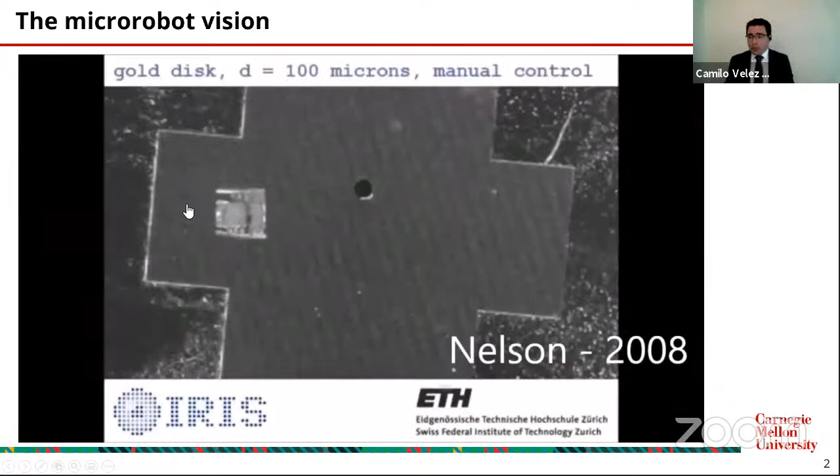The vision has been updated, especially by movies like Big Hero 6, trying to have a swarm of robots that can cooperatively work and do something. Right now the state of the art is little robots that move, mostly magnetically, and the work they can perform is still simple.

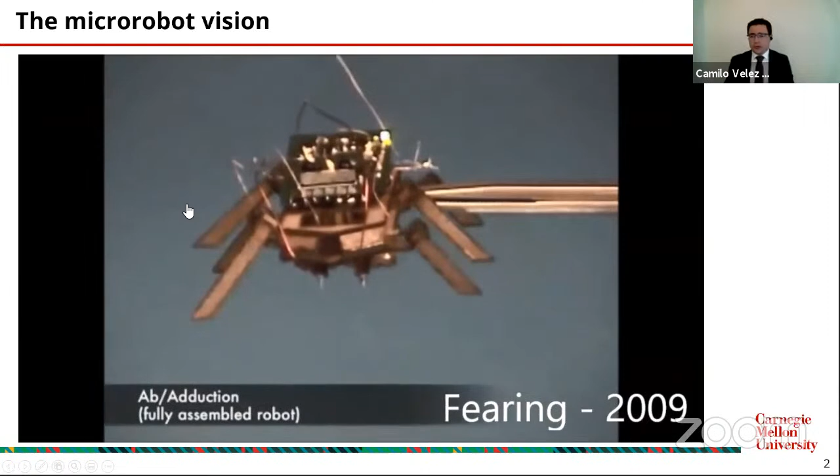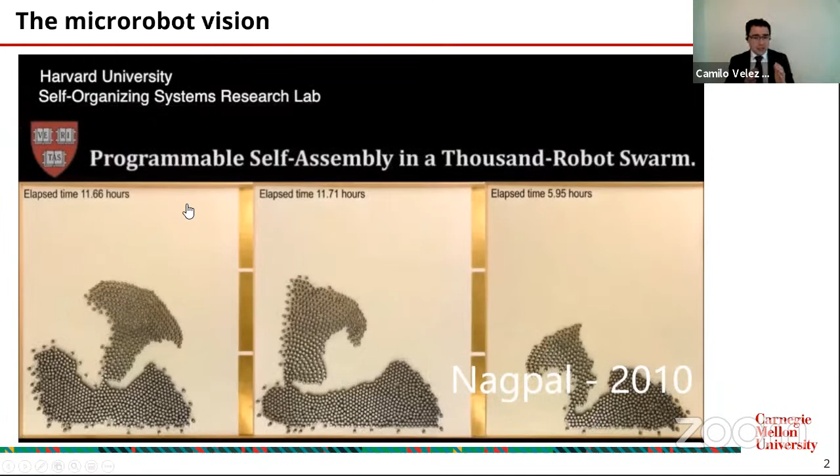We have flying robots from Professor Wood in 2008, and walking robots from Professor Fearing in 2009 — these are just examples of cooperative work. We consider microrobots everything at small scale, like below centimeters, and most of those robots have been tethered, attached to magnetic fields or wires, as you can see in this video.

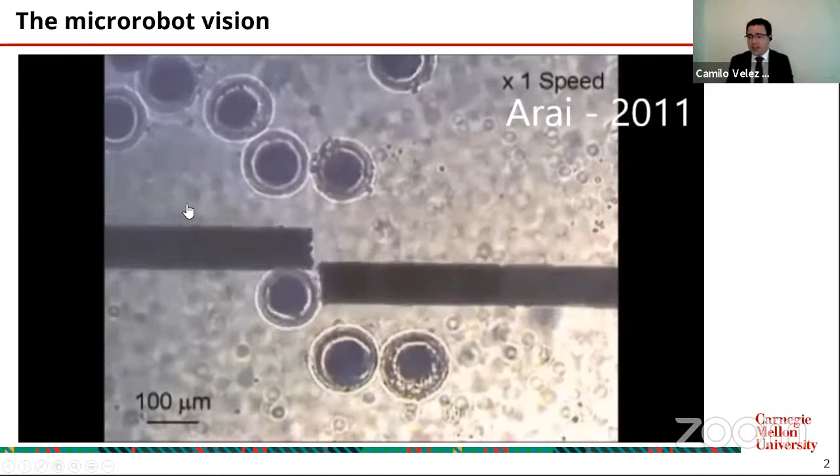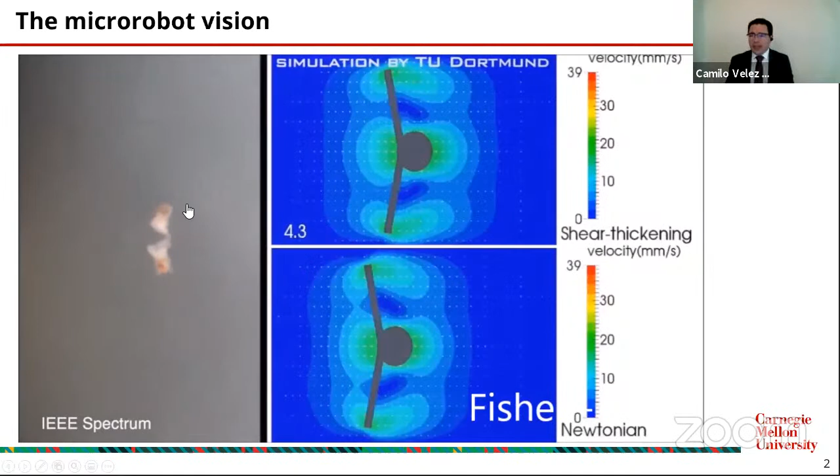They will need to improve a little bit in order to do complex tasks in the future. Right now we have some that can walk, that can swim, that can fly. This is a very exciting time for microrobotics because there is plenty of opportunity.

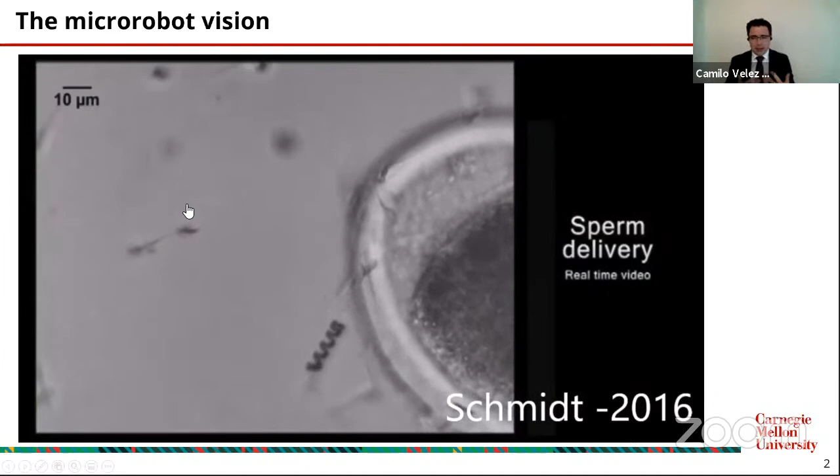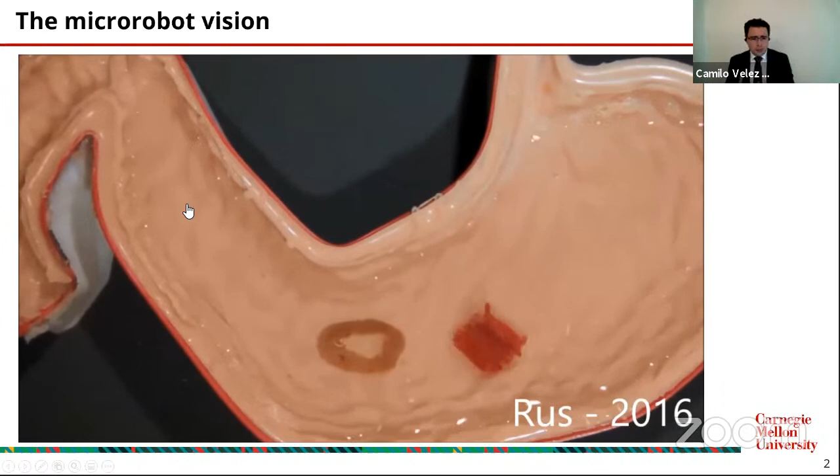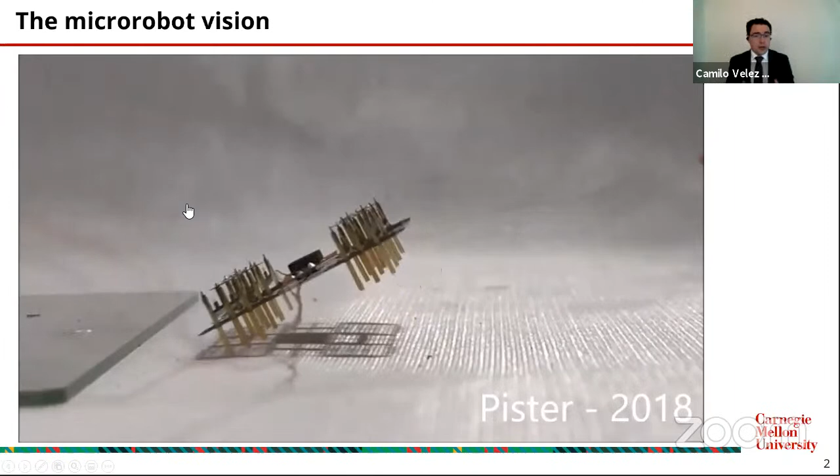One of the most important opportunities is in biology, and the interaction between these microrobots and cells. Here we have some connecting with sperm cells for fertilization. This one is to put in the stomach, from MIT, just to pick up batteries and patch some infections in the stomach. And we have some interactions with bacteria, as the one we saw here.

So a little bit of the panorama of microrobotics: it's in the robotics industry, of course, which is a growing industry that last year reported around $38 billion in revenue, and it's growing very fast. You're going to find microrobots in two realms — one is in medical implants or medical and surgical robots, and the other is industrial applications.

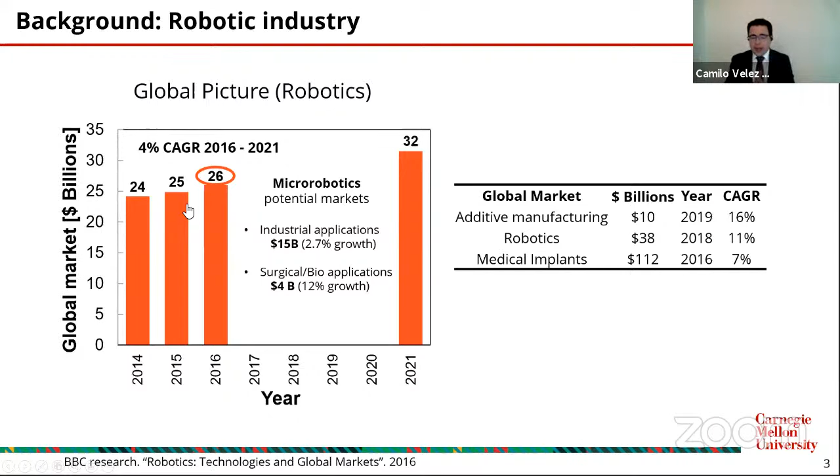Just because the type of robots that I'm going to present to you require additive manufacturing, I add this market of additive manufacturing, which is growing very fast and is an enormous opportunity.

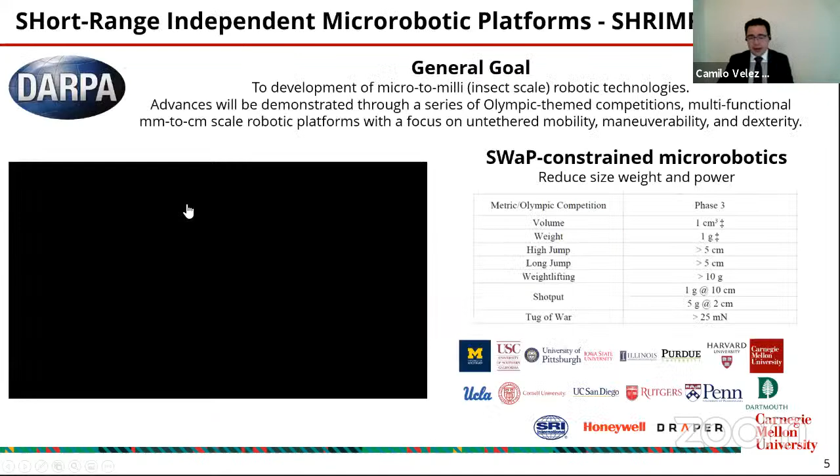So what I'm going to present today is a big challenge created by the Department of Defense, by DARPA, where they're trying to make little microrobots more functional and do different jobs. They created this program called SHRIMP, creating robots at millimeter scale, like 1 centimeter by 1 centimeter by 1 centimeter, that can integrate electronics, actuators, and the battery itself.

So that was the big idea, that they participate in a competition where they can jump higher, throw something in a shot put competition, long distance, weightlifting, or tug of war. It was 14 universities and 3 companies working on this one.

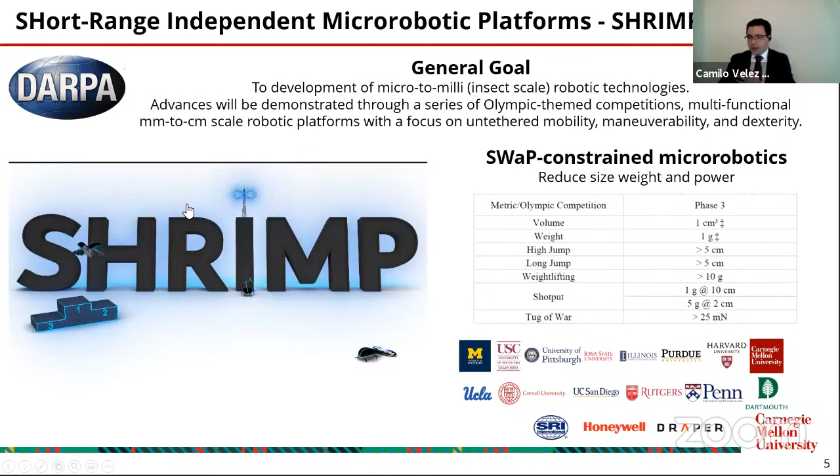The approach that we took at Carnegie Mellon in Professor Sarah Bergbreiter's lab was to use the technique that is right now the most commonly available for microrobotics, which is 3D printing and additive manufacturing. But if you want to do a microrobot with additive manufacturing, not all 3D printers work.

The state of the art of the most used one is going to be the 2-photon polymerization technique, and this is the one that you can find in Nanoscribe, as a 3D printer.

This 3D printer uses laser, and as I mentioned, the 2-photon polymerization technique just tries to combine a voxel of light, and the polymer is going to be cross-linked, or polymerized, only in that region. That voxel size is going to have, generally speaking, 250 nanometers in depth, and a height of around 1 micron. So that gives us the versatility to make very small machines.

But the big question is, from a 3D printed part that is normally a polymer—previously in our group we started working with multiple materials, but those materials were not active materials. So how can you integrate these 3D printing techniques with active materials, such that your robot can start doing things, and you can start creating mechanisms?

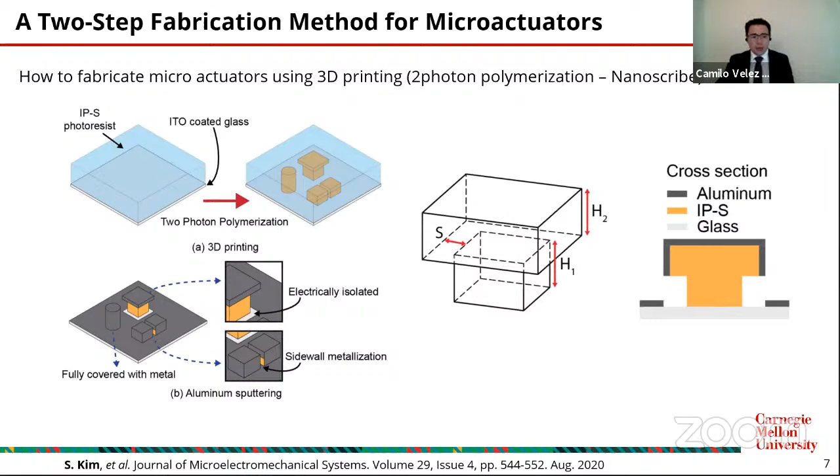And in the design or engineering of the shapes, we're going to leave some gaps underneath the structures, such that we break the electrical conductance of the aluminum. So we're going to have areas that are conductive and non-conductive. With this approach, we managed to create some thermal actuators. That's the first step into an actuator.

You're going to pass current through one of the beams. The beam is going to heat up more than the other one because of the aspect ratio of the shape, and this one is going to deform at a different rate than the big one. By using this approach, we prove that we can make actuators with only 2 steps: 3D printing, and afterwards sputtering of a metal.

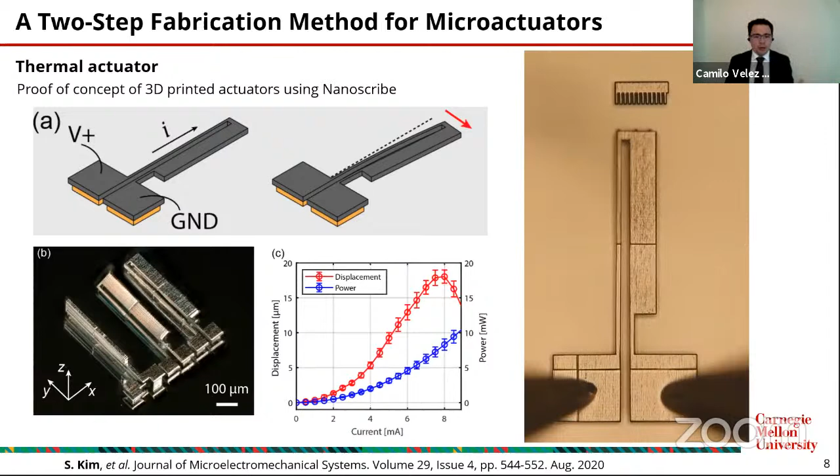We test these devices, and we manage to actuate this up to 8,000 cycles. So those are reliable actuators that could be used for prototyping.

We move a step forward and test electrostatic actuators. In this case, you just apply an electrical field between these two ports, and there's going to be a capacitance on those fingers. It's a common microelectromechanical machine and technique.

You're going to generate electrostatic force that will attract this comb drive, as we call it. We can generate displacements of around 12 micrometers, of course with higher voltages than the other one. The big advantage of a 3D printer is that you can do very crazy shapes. For example, these wings were entirely 3D printed, and then you just sputtered the material in a single process, and you manage to have these flaps or wings flapping in the air and producing these types of shapes.

There are a lot of mechanisms that can be designed now if you have a 3D printer. But again, the big question from DARPA is how can you make better mechanisms, or better in terms of work? So we want to increase the work density of our actuators, and to do so, we need a material that can deliver high work.

Among the materials currently available, you have the electrostrictive polymer, but the strain is not so much, and the stress you can generate is not high enough. You can have piezoelectric or magnetostrictive materials, but the material that right now has a better form factor for work density is going to be the shape memory alloy.

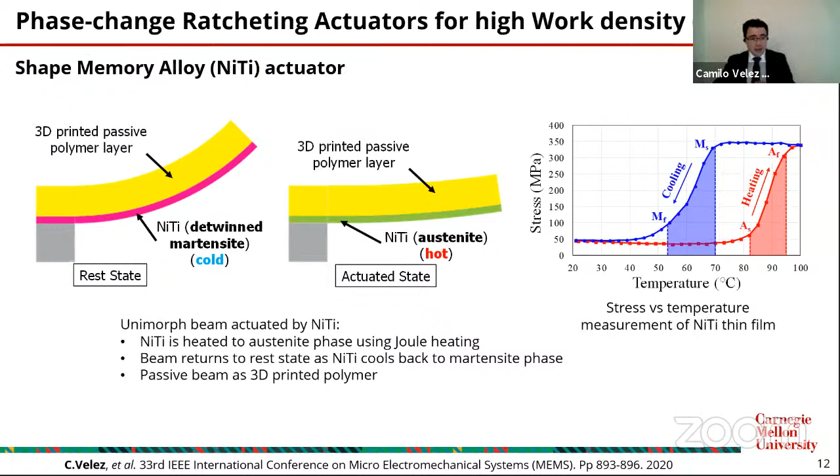For this experiment, what we're doing is common microfabrication. So we have a silicon layer. We co-sputter nickel titanium at a 50-50 rate, more or less, then pattern the nickel titanium using ion milling.

After you pattern the material, you 3D print the polymer. The polymer that we selected was IP-S for Nanoscribe, which came from the vendor, because of the stress that we want to generate in these parts.

So we generated some models for this. We used analytical models, and we also used COMSOL simulations for this one.

At the beginning, we just tried one single cantilever without passing current, and we were heating externally. And we corroborated the implication of having a different thickness on the passive layer.

It means on the 3D printed part, in the actuation of the material, in the initial deflection, and then in the stiffness of the generated material. It's very interesting because we have a very good agreement between our predictions and the model.

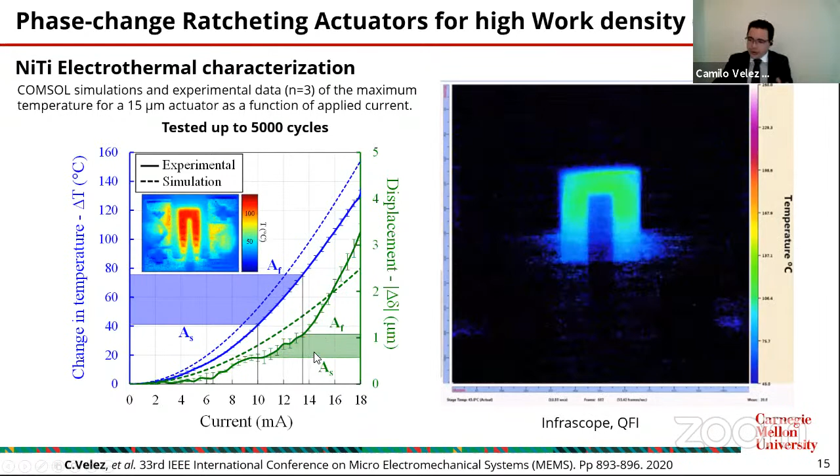This was the COMSOL simulation that we had here. Again, some good agreement, but we were improving the technique, so we can always do a better job in this one. At the end, we managed to 3D print very complex patterns, like this one here.

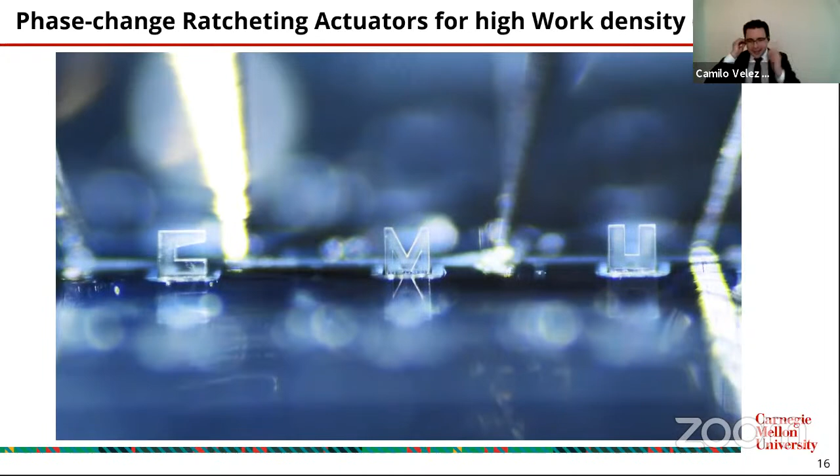This is the CMU logo, and well, in non-COVID situations, I will have the bagpipes sound in the background of this, but otherwise it's going to be crazy in the presentation.

But you can have actuators with very incredible shapes. More than having a nice 3D printed part on top of it, what we are going to do is use this for energy efficiency.

So we demonstrated, and this is work from Manoush Babaei and our team, that by patterning the polymer, we can increase the efficiency, because we are reducing the bulk material that we need to heat up and cool down, and we can increase the stiffness of the passive layer. So we actually can engineer this, and we reach some enhancement on the energy efficiency up to 800%. And that was wonderful, because now you're taking full advantage of the 3D printing and the microfabricated patterns.

So trying to move this project forward, we tried to integrate these actuators with more complex mechanisms. What we're calling hierarchical integration of thin film actuators is simply integrating not just one finger, but multiple fingers with the 3D printer. In this case, we're presenting 8 fingers just to increase the force that we're creating with these patterns, and we're making an array of 6 of these actuators.

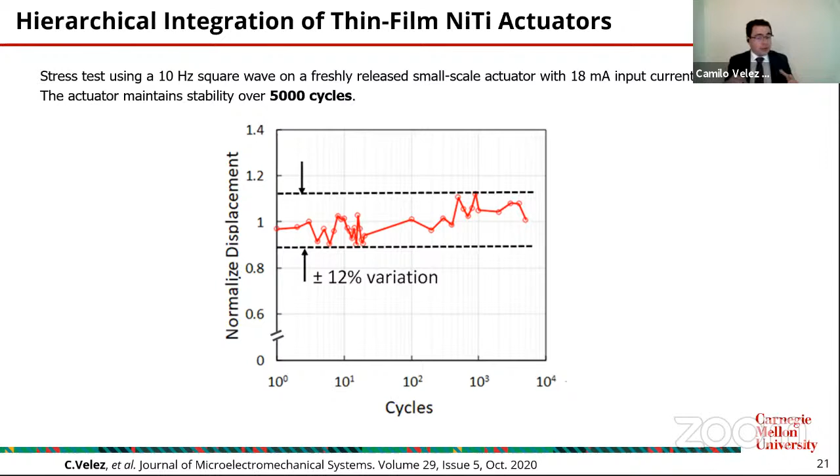If you compare this with the environment you had in the past with transistors, the transistor was microfabricated with a big lithography mask, but the gate, the most important part, was usually made using a technique like e-beam writing, which is a sequential technique. You can think of this as a batch fabrication technique for microfabricated parts, and the beam itself you can 3D print in a serial pattern. So it has huge potential.

I'm going to show the final video of our actuator integrated with a microcontroller and a battery. This was completely unconnected to an external power supply, moving all the actuators on the hexagon, and you can control the hexagon actuation. You can actuate it by pairs, individually, or all at the same time. This is a proof of concept that we can create a more powerful mechanism based on our actuators.

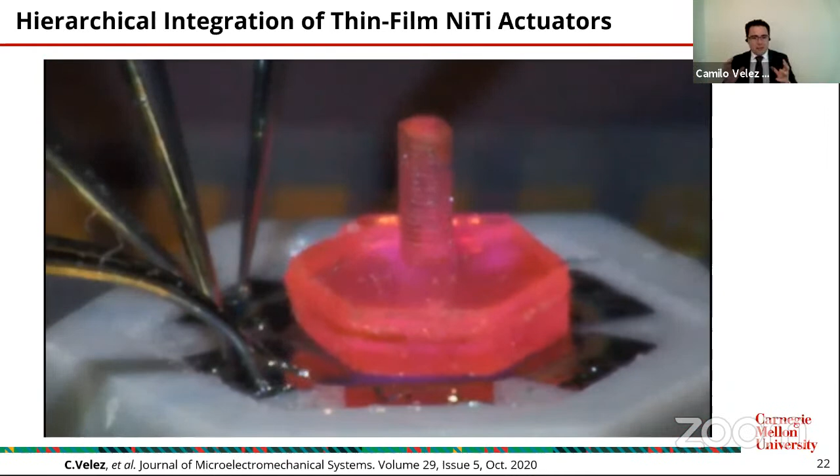Here we're presenting a 3D printed part. This is a mesoscale 3D printed part, made on an Asiga. This is a millimeter size part that you can integrate into this actuator. Right now we were demonstrating a positioning mechanism where you can control the position, but you can also use this as a torrent to integrate it with a ratcheting mechanism and actuate it.

In conclusion, we demonstrate the ability to integrate 3D printing with microfabrication to create very powerful actuators that generate a lot of work at the millimeter scale, which is what we want. This is stable up to 5,000 cycles, and it's very cost effective for prototyping.

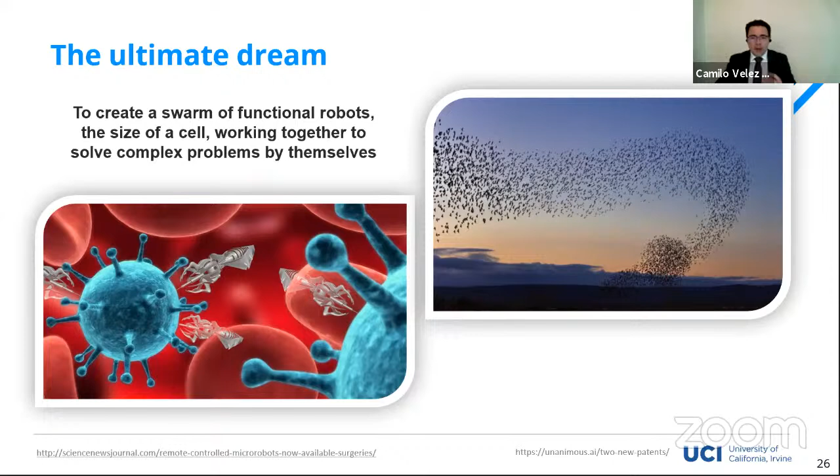And one vision for the future. As Ryan and Haley mentioned, I recently joined University of California, Irvine, and I'm creating my laboratory called the Magnetic Microsystems and Microrobotics Lab. Our vision is to create a swarm of functional robots the size of a cell that work together to solve complex problems by themselves, and the way we're doing that is by increasing their autonomy.

This is just a sneak peek into the future. I'm going to be working on advanced manufacturing of magnetic materials, combining 3D printing with magnetic materials. We need to combine biohybrid and biopowered micro robots that can work with cells and inside the body. And at some point, create a swarm of micro robots that work untethered to do a job, like ants, bacteria, and cells do in your body or in nature. We need to create a swarm of robots to work cooperatively. Everything here is about gaining micro robot autonomy and trying to solve medical and manufacturing industrial applications. Thank you very much, and I'm open for questions from the audience.

All right, so we have a ton of questions, we're gonna try to rock through as many of these as possible. One of our first questions you already addressed in your slides. Michael Barron asked, how many cycles can you achieve until failure for the NiTi? I think you mentioned 5,000 cycles, right?

We tested 5,000 and didn't find failure. In another test we did 8,000, and again haven't found failures yet. So we haven't done a systematic approach to find the limit of these. It's highly dependent on the current you're applying. If you start increasing the current, or pulsing to generate higher efficiency, you're going to start damaging your device at some point. If you keep the current in the sweet spot where you're transitioning phases in the material but not damaging the polymer, not reaching its deformation temperature, you can have many cycles. We haven't proven the exact limit yet.

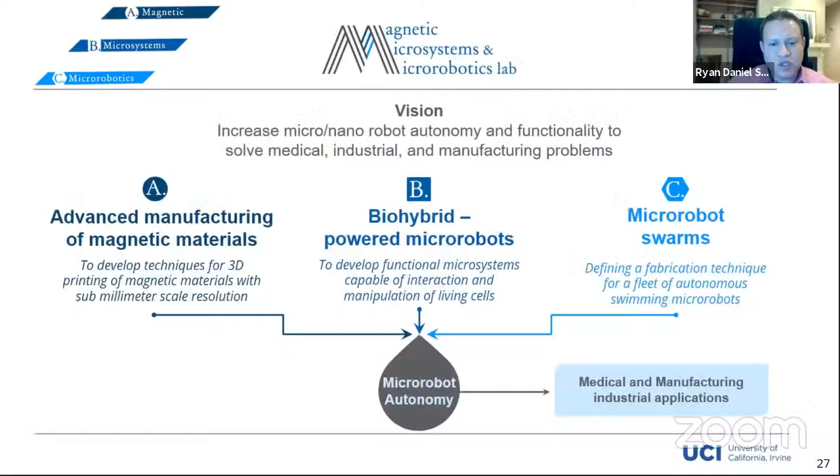Mac asked how the NiTi cantilever is released from the silicon substrate, and did the NiTi require any kind of protection layer? How are the NiTi cantilevers released from the silicon, and did they require any kind of protection layer?

An important note is that you need to engineer some trenches in the actuator so the xenon difluoride can go uniformly through the entire actuator, so you don't have something released on half of the actuator while the other half is still attached. But if you cover that, xenon difluoride is a perfect technique.

One of the questions asked by Aaron Farrell was actually one I was going to ask as well: is the goal to use this additive manufacturing strategy and sputtering purely just to make prototypes? You had a number of designs, like 3 micron thickness, 7 micron. Are you using it purely for the prototyping stage that would eventually be mass produced using conventional manufacturing, since most of the designs look relatively planar?

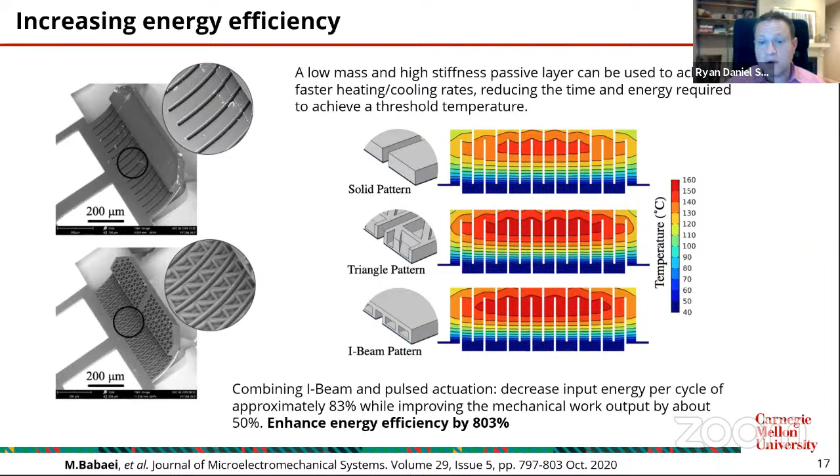I think this is the last question I'm going to ask in terms of timing today. This one is from Nathan Brown: are there any other materials you're considering, other than NiTi, that would provide better material properties for the kind of applications you're considering?

Yes, as I mentioned, one of the materials we are working with is GeTe, germanium telluride - please stay tuned for the most updated results. We don't have it published yet, so I'm not going to present it here. Other collaborators, especially Gianluca Piazza, part of the group, conducted that part of the experiment. That material could give us a higher work density, but the temperature required to actuate and change phases is also higher. So the challenges are completely different, and the materials you'll need to work with are completely different. But yes, it could be done.